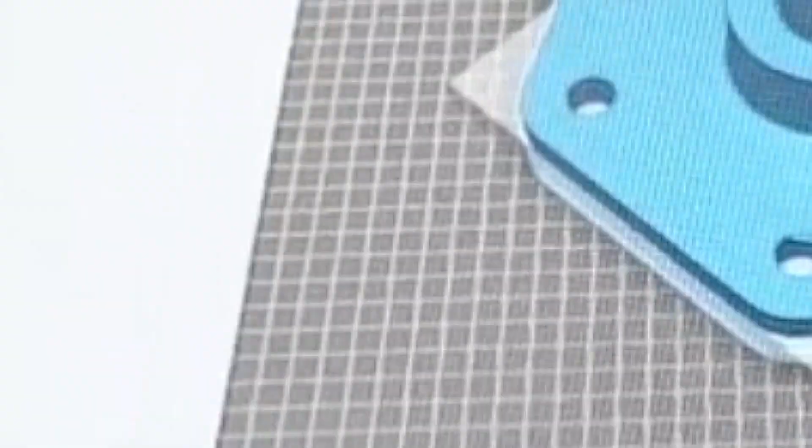Battle damage, aging systems, as well as maintenance and logistic lead times are not new to the United States Air Force or the Department of Defense. Innovative technologies are now available to establish a global network of organic reverse engineering and agile manufacturing cells that can get systems ready for the fight and in the fight.

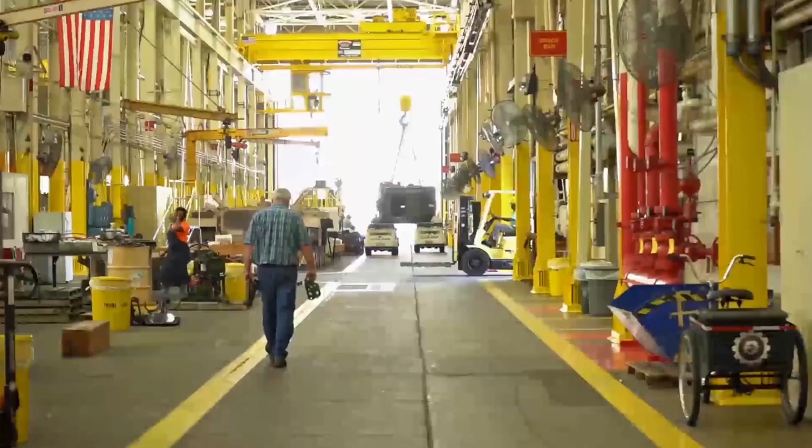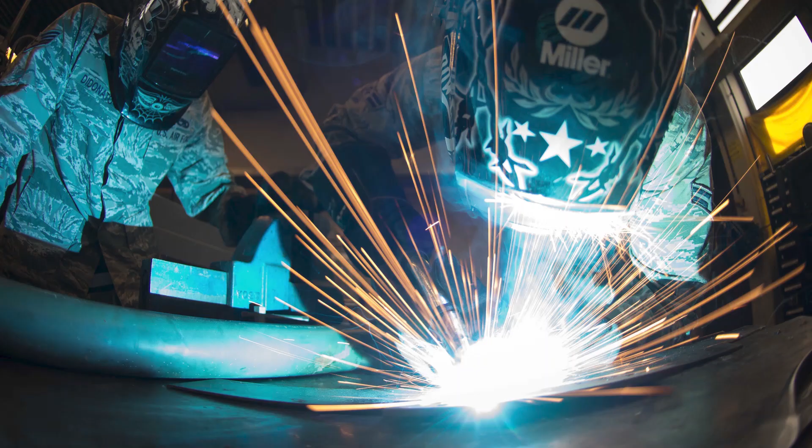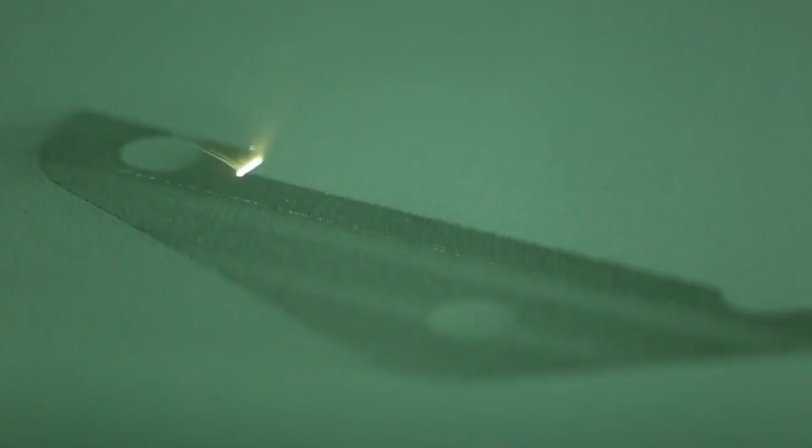Sabel's digital engineering cloud is structured to allow the Air Force to maximize its global capacity of airmen, civilian engineers, technicians, tools, and equipment. It will provide visibility of orders, ensuring materials are available to support demands. It will provide reverse engineering software, datasets, and data subscriptions to recreate reliable, producible, and airworthy parts.

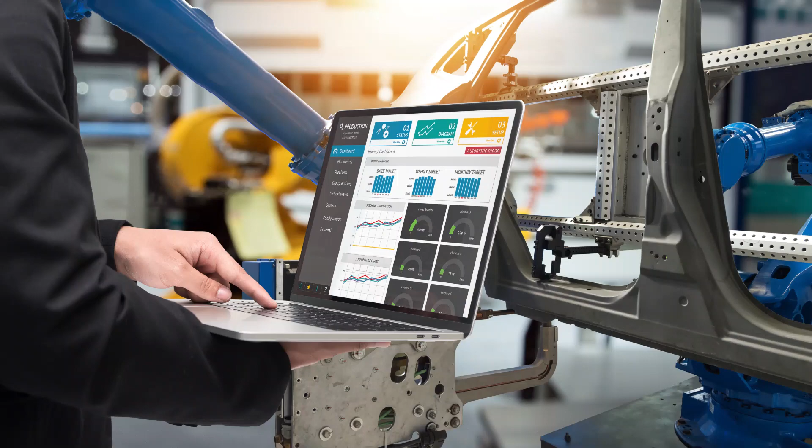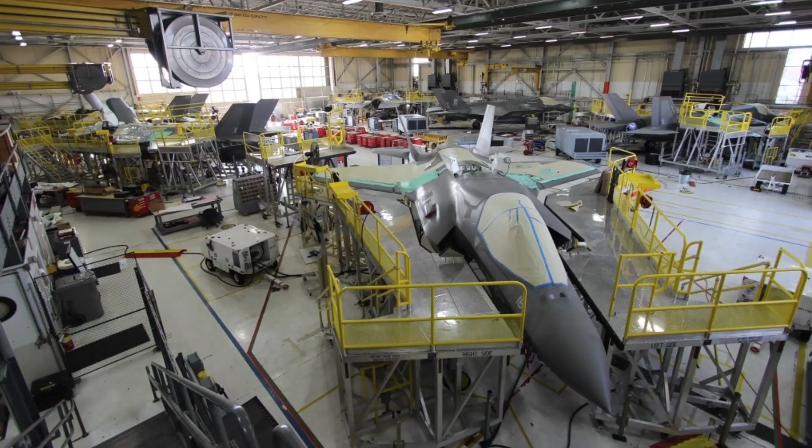Our process and data management affords global access to trusted libraries of manufacturing technical data, training, engineering approvals, and collaboration, pushing workload to home station, depot, and program offices. Using Internet of Things, we monitor equipment health and quality to ensure critical assets are being used and working within tolerances.

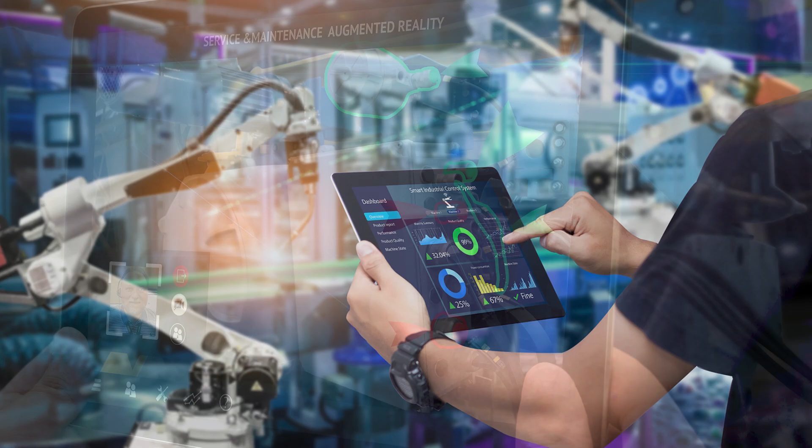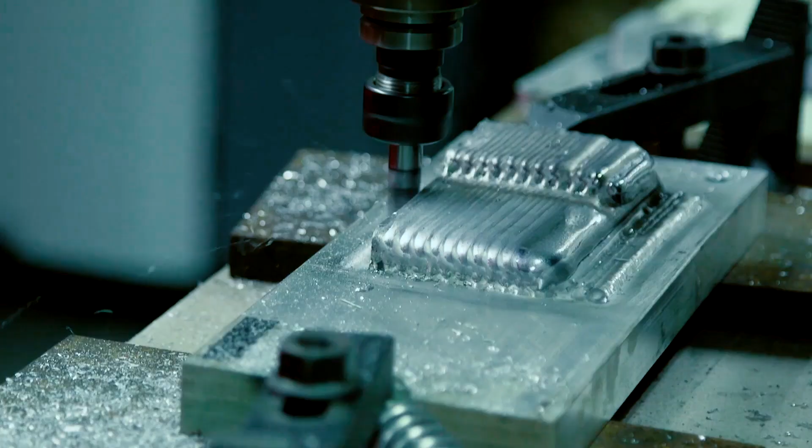Our framework offers business model flexibility, allowing seamless workload transitions between the multitude of programs, contractors, and other enterprise components.

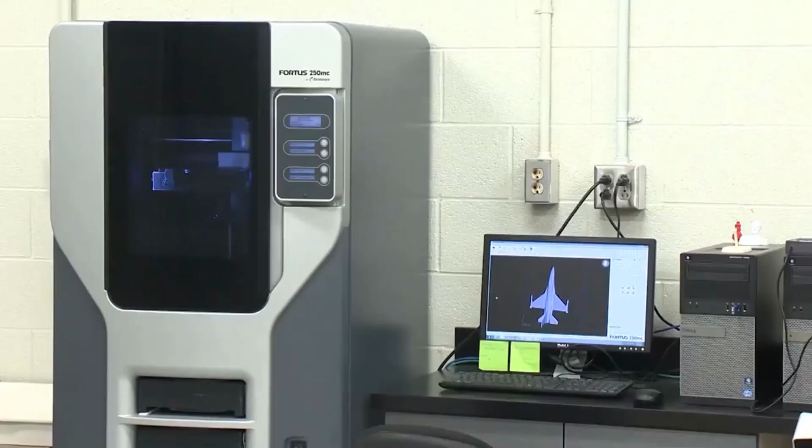Our Digital Advanced Manufacturing Operations Cell, or AMOC, is currently deployed at Marine Corps Systems Command. It provides a turnkey solution to more rapidly and effectively manage complex ideation, design, development, sustainment, and disposition.

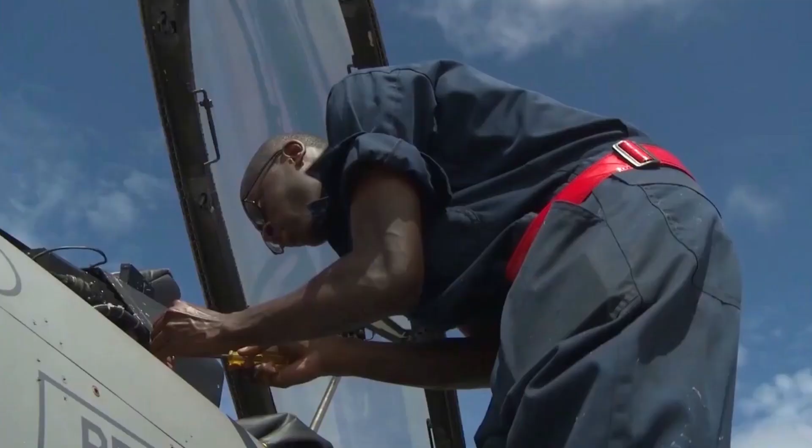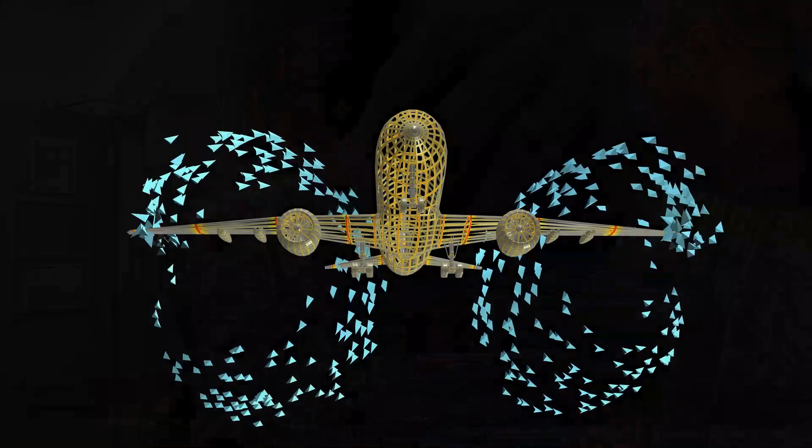This results in faster product design and development by reducing engineering cycle times, improving product quality, and cutting rework through access to computer-aided design, computer-aided engineering, computer-aided manufacturing, advanced multi-physics modeling and simulation, product data management, augmented reality, and of course, Internet of Things.

Founded in 2001, Sabel Systems is an economically disadvantaged, woman-owned small business that provides innovative solutions to organizational challenges and needs. Our company is focused on technological innovation.

We have achieved objectives on major IT initiatives for big business as well as federal and local governments by providing them with solutions that deliver optimum functionality and cost-effective value for their investment.